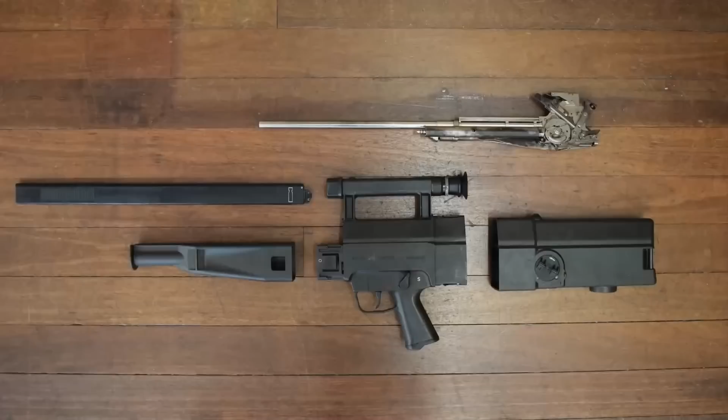I'm going to show you how to field strip an HK G11. Let's dive straight into the space magic and see how it works.

First we remove the G11's cleaning brush that's held in a compartment in the pistol grip. A little fiddly with just fingernails, but it's doable.

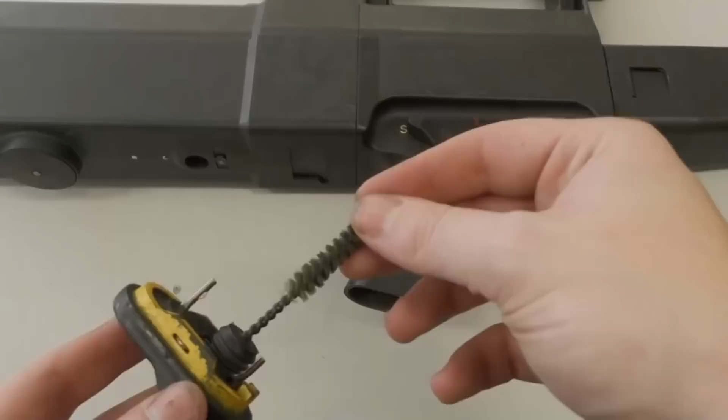The brush is used to check that the chamber is empty. It's inserted into the circular ejection port seen a few inches behind the pistol grip. This checks that the chamber is empty and that the weapon is clear.

And when you finish with the brush, you can insert it back into the pistol grip and carry on with disassembly.

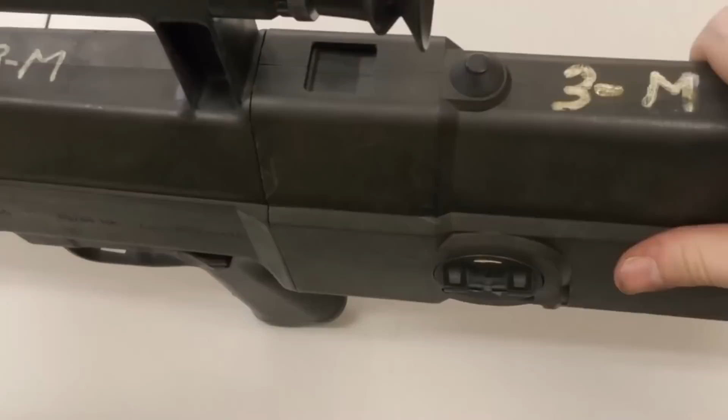Next we'll remove the G11's 50-round single stack magazine.

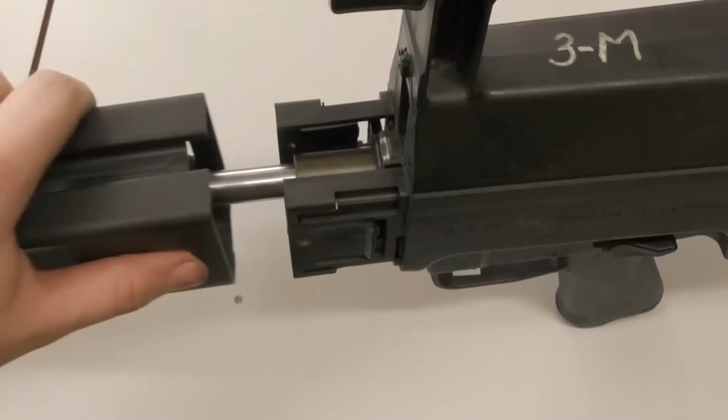As you can see, I've already freed up the fore end as the plastic locking tabs are quite stiff. Inside the fore end is a metal tube that the barrel projects through. The barrel assembly is essentially free-floated.

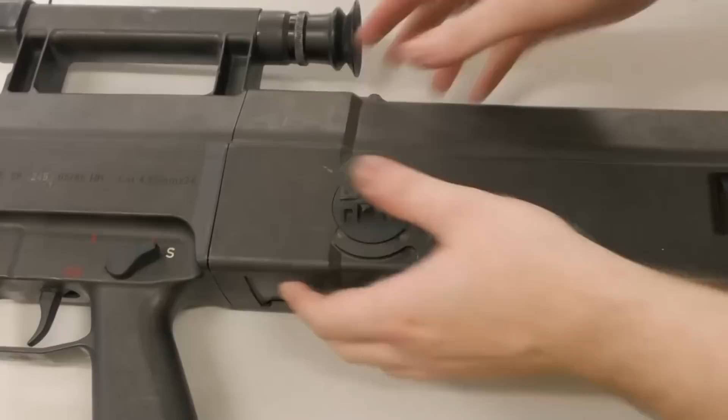Now we need to remove the butt assembly. To do this, we depress the two locking tabs at the same time and pull it to the rear. As you can see, it's a bit of a three-handed job here.

You have to ensure that the action is cocked to allow the rear assembly to slide off. And now we have the rear of the breech and barrel assembly exposed.

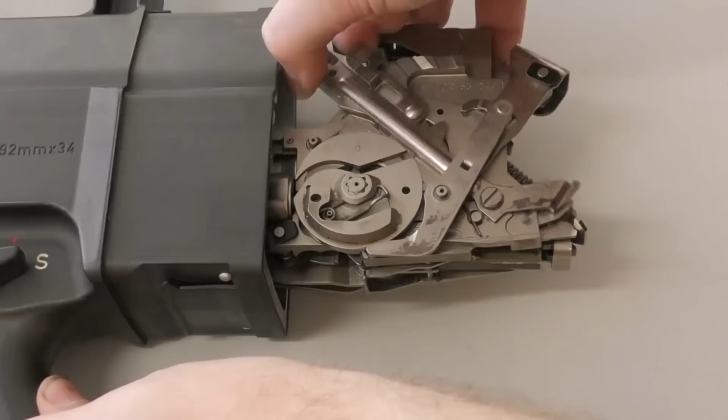The next step is to free the control disc. To do this, we lift the catch spring and move it clockwise until it clicks. Now we must depress the clamping spring to free the disc from its post. With the spring depressed, the control disc can be lifted up from the top of the cylinder.

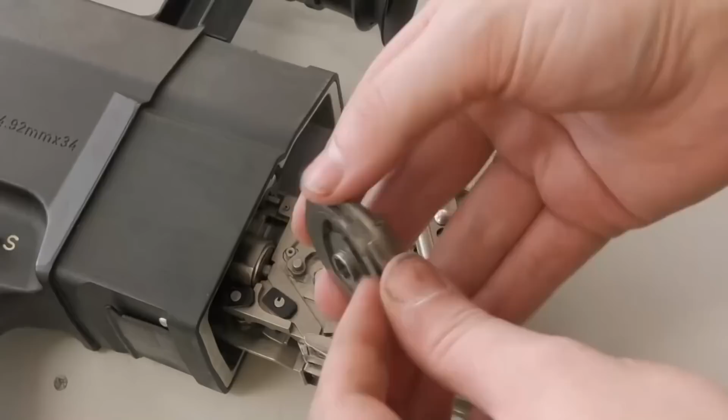We'll set the control disc to one side for now, and we'll take a look at it in a moment.

We can now push the catch spring clockwise again to its next stop point, so that it's no longer covering the cylinder.

Next we have to press the cylinder stop lever counterclockwise. Then, pushing up from the other side of the action, we can lift the cylinder out of the breech assembly. Sorry my hand gets in the way here, but it was a little bit tricky getting the cylinder out of the action.

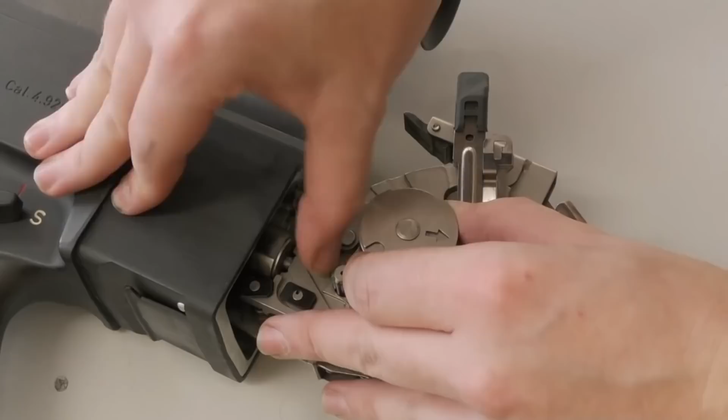Here we can see the square chamber inside the breech cylinder. This piece is held in place by a retainer spring. Now that the cylinder is removed, let's take a closer look at the breech assembly.

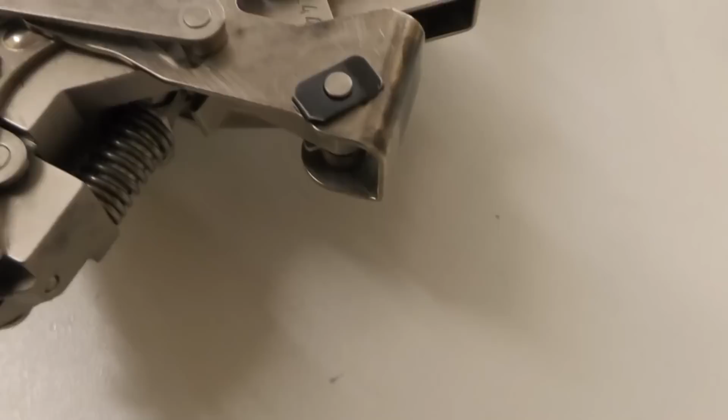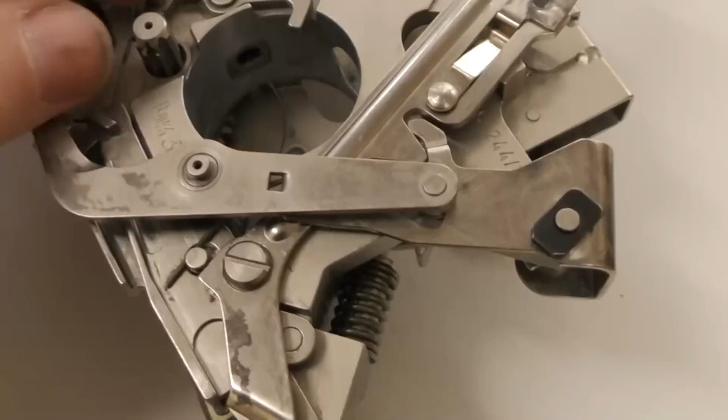We can see the compression spring which attaches to the clamping plate, the space for the breech cylinder and the beginning of the barrel, the spring catch and the ejector lever, the striker assembly, and the control lever, and beneath the action we can see the sear and the stop lever.

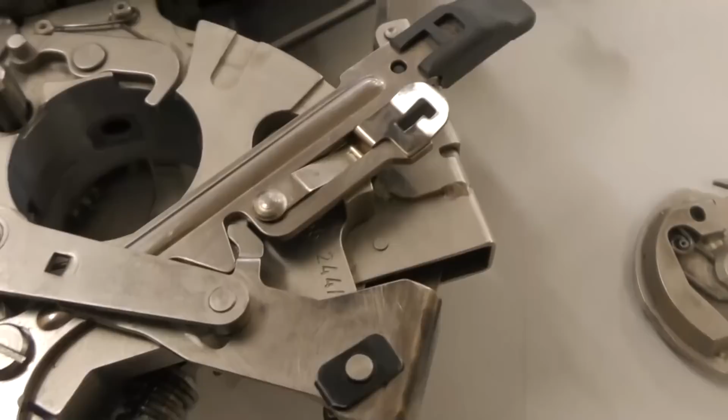And the part I'm pressing on here is the slide. We're now beginning to get an idea of just how complex the G11's action actually is. The 1989 HK ACR manual lists over 440 parts making up the rifle, with over 140 of those going into the actual action itself.

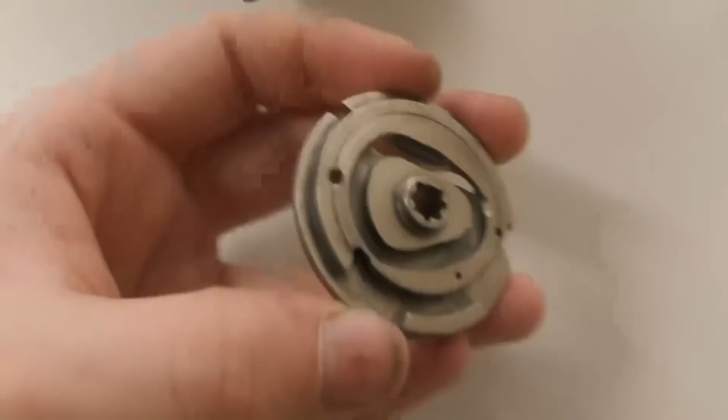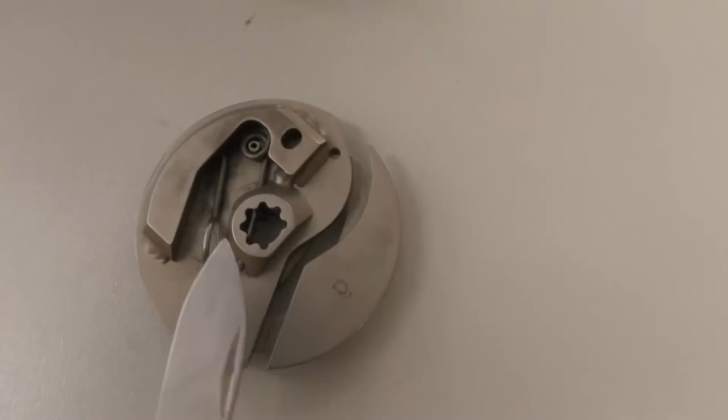Okay, now let's take a close-up look at the control disc. That outer groove interfaces with a tab on a pivoting latch, which interacts with the stop lever. Using my trusty Swiss pointing device, we can see where the central post interfaces with the disc and how the clamping spring clips into the notch on the post.

Here we can see where the square breech lines up with the round bore. And from this angle we get our first view of some of the G11's gears.

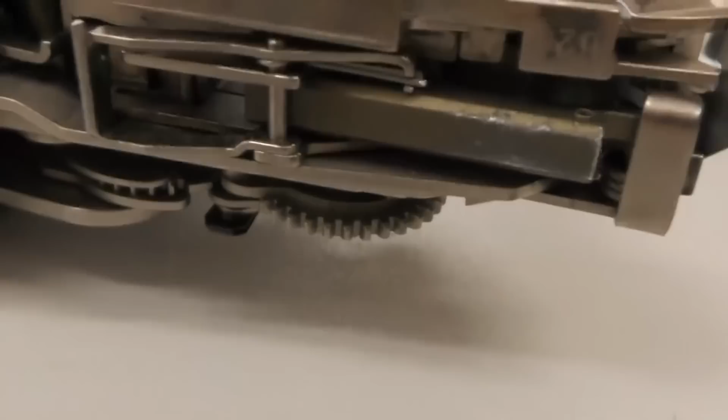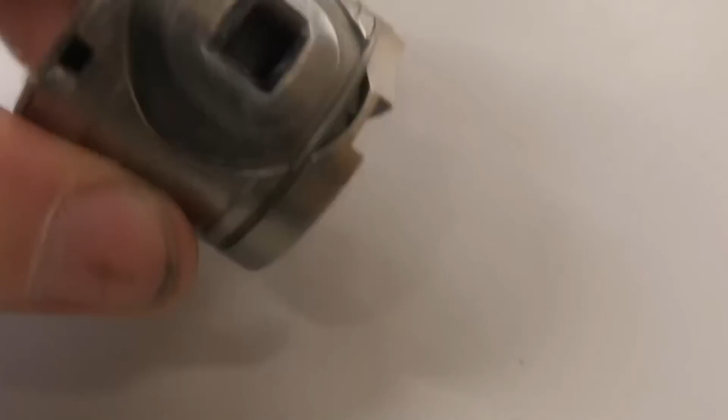Let's look at the breech cylinder. This can be disassembled further by removing the spring retainer which holds the chamber in the cylinder. But while disassembling I didn't want to take the risk of losing the spring.

The chamber was actually a replaceable part. HK literature from 1988 notes that the chamber had an approximate service life of around 3,500 rounds, but it was hoped that a planned redesign would extend this towards 6,000 rounds.

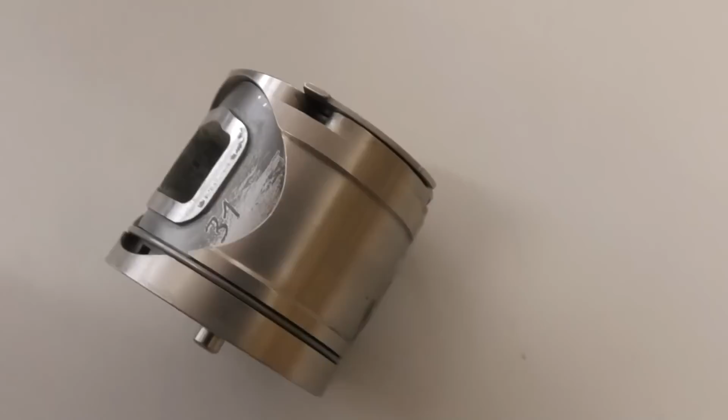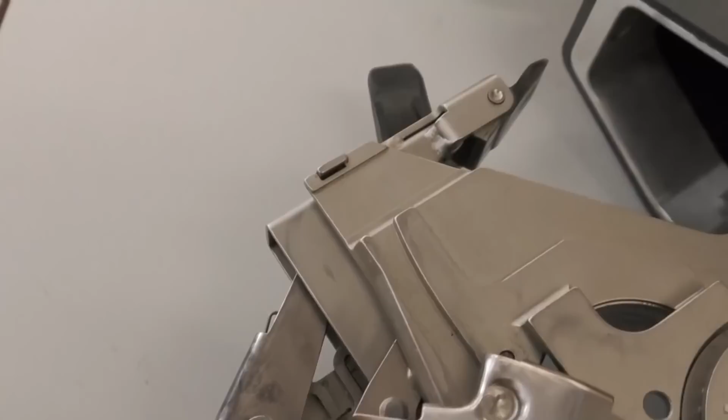With the weapon flipped, we can see the other side of the action. We can see the actuating lever projecting from underneath the spur gear, and from beneath that we can just see the disconnector. And here we can see the magazine catch and guide housing.

Here we can see how the G11's pair of gears move. During the firing cycle, the connecting rod, attached to the actuating gear here on the right, moves the gear, acting on the spur gear on the left. This in turn actuates the feeding lever, which we can see here moving up and down. Here at the back, attached to the clamping plate, we have the striker assembly and spring.

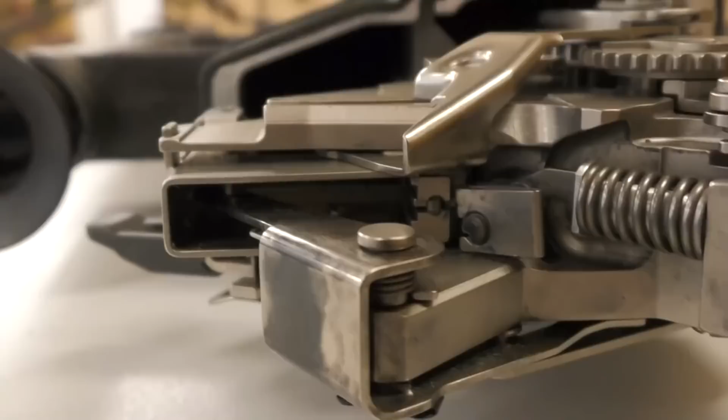From this angle we can see into the rifle's centre assembly. We can see the magazine guide and the robust guide rail where the barrel and breech assembly is held in the G11's centre assembly.

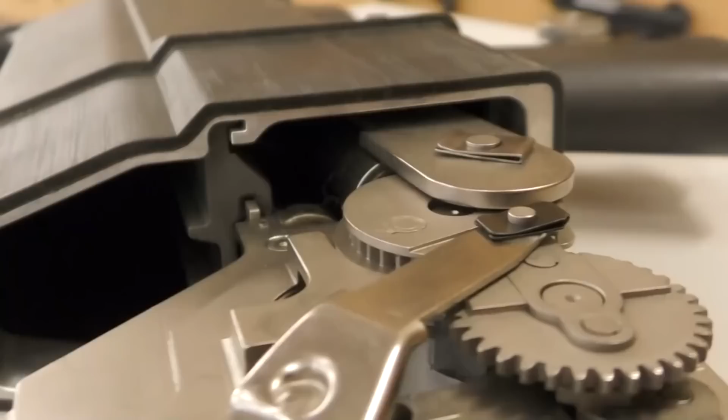And at the base of the action we can see the sear, and here's a side view of the G11's gears moving.

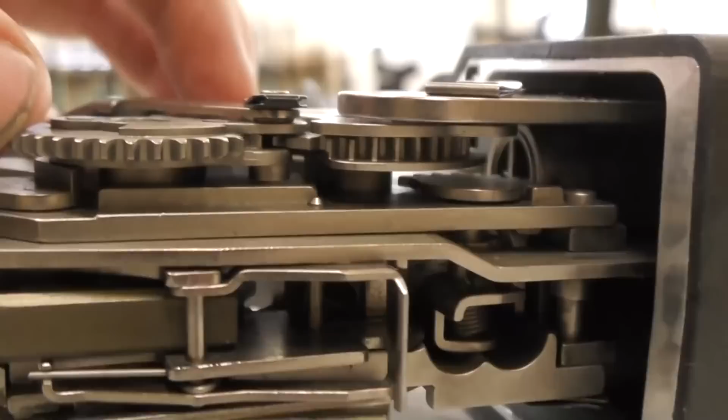Inside the centre assembly, just below the barrel, we can see the rear of the G11's recoil mitigation buffer system.

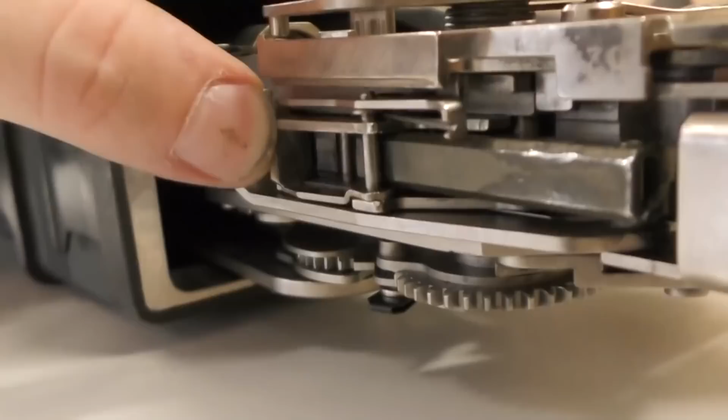From this angle we get an idea of just how intricate and complex the G11's action really is. We can see a number of springs and numerous high tolerance moving parts.

Here, with the weapon on safe, we can pull the trigger to show how the actuating lever acts on the clamping plate and compression spring, which in turn acts on the firing pin.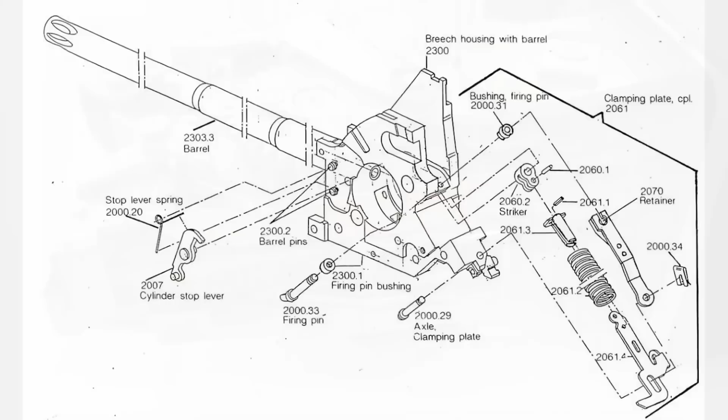These diagrams from the G11's manual go some way towards showing how complex the action actually is.

The magazine, when loaded, travels back through the centre assembly into the action. Here we can see the magazine catch, which is acted on by the external magazine release button.

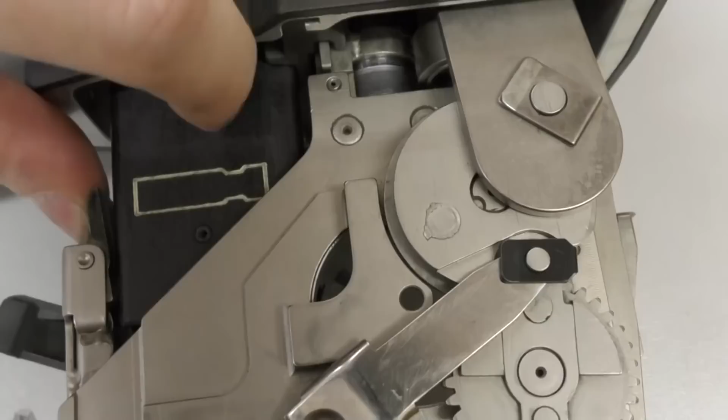Here, with the magazine inserted, we can see how the catch works. Note the white outline of a caseless round to show which way up the magazine should be inserted.

Once the breech cylinder is removed, the operator's manual provided to the US Army in March 1989 actively discourages further disassembly. I could only go a little further before special tools that sadly I didn't have were needed.

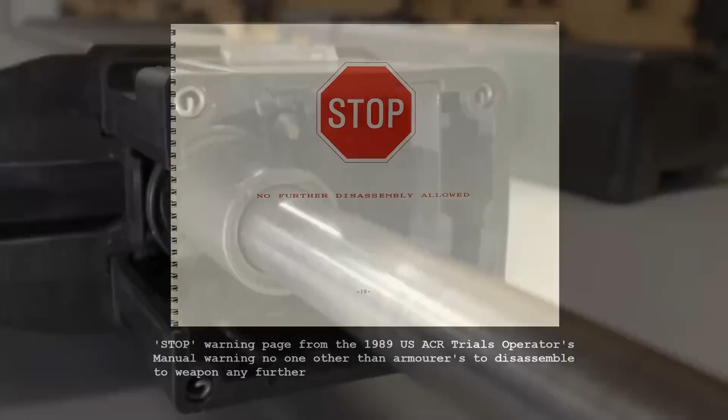To release the breech and barrel assembly from the central assembly, a small catch has to be released to allow the breech assembly to come free, allowing it to slide out of the rear.

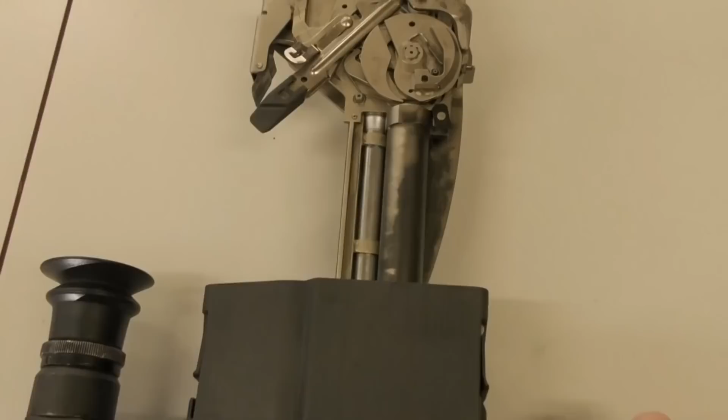Here's the G11 disassembled into its major assemblies. We've got the magazine, fore end, centre assembly, barrel and breech assembly, and buttstock.

During a field strip of the G11, it's not necessary to remove the barrel and breech assembly from the fore end and centre assembly, but I decided to do it so that we could have a look inside at both the gas cylinder and the buffer assembly.

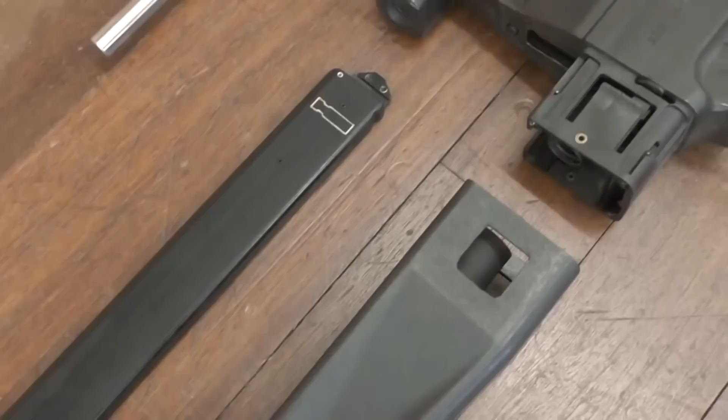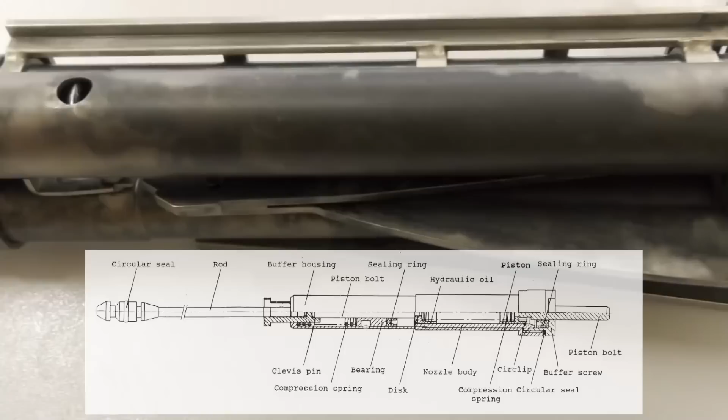Here we can see the housing containing the counter-recoil mechanism, which mitigates the weapon's recoil. We can also see the pointed tip of the buffer extension. This overlaid diagram from the 1989 Armourer's Manual shows the internals of the recoil system.

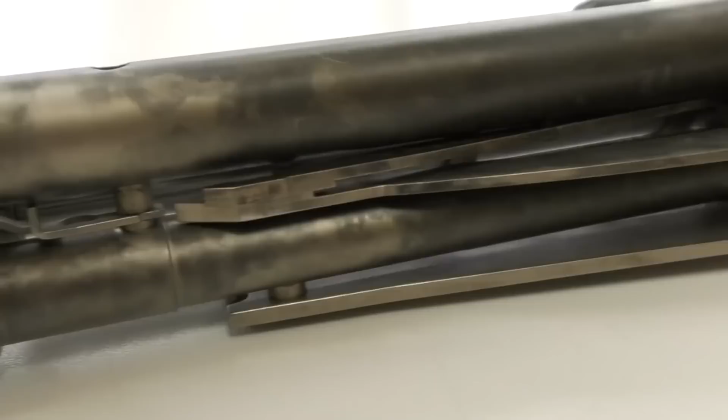Under the barrel we can see the sear arm, operating rod, and the various catches, springs and clips which hold the assembly together.

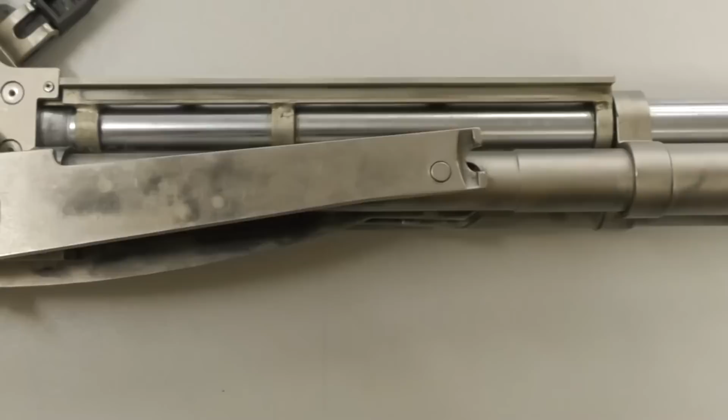On the right side of the gun we can see where the operating rod connects to the gas piston system, and at the other end of the rod we can see where it attaches to the actuating gear.

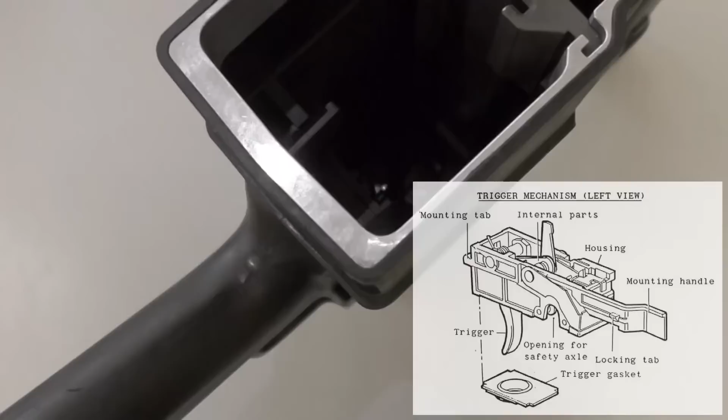Let's take a look inside the central assembly, which houses the trigger mechanism and the guide rail interface. Above the guide rail we can see the sealed track that the magazine runs in.

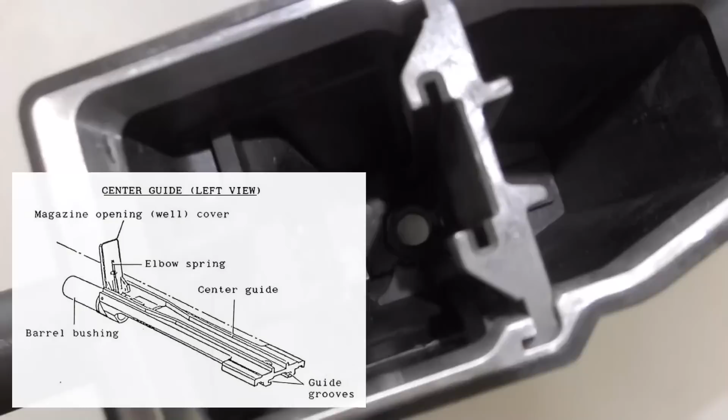Here we can see the hole in the centre assembly that the barrel projects through. And in the magazine compartment we can see the hinged door that stops dirt from entering the action.

Okay, before we reassemble the rifle, let's take a look at how it worked in principle. G11 has 3 modes of fire: single shot, 3-round hyperburst at approximately 2,000 rounds per minute, that's about 33 rounds per second, and full auto at 460 rounds per minute.

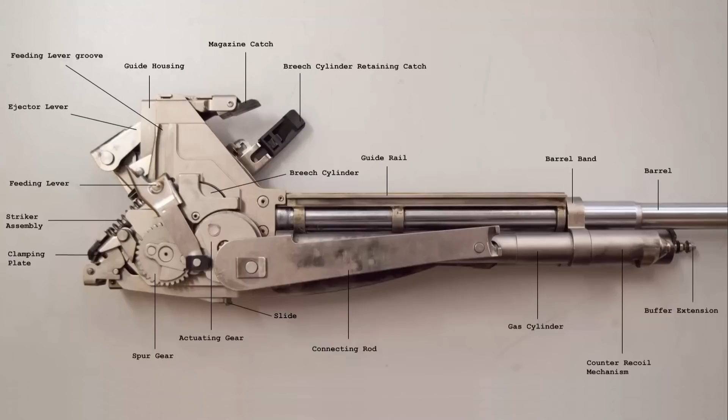It's a gas-operated rotating breech system with a spring buffer system to control recoil. Rotating the weapon's cocking handle drops the first round into the breech cylinder vertically. It then rotates 90 degrees with the breech cylinder lining up with the bore.

When the trigger is pulled, the striker assembly ignites the round and fires the weapon. As the rounds are caseless, there is no extraction of the spent cases. An ejector is present for clearing the weapon only.

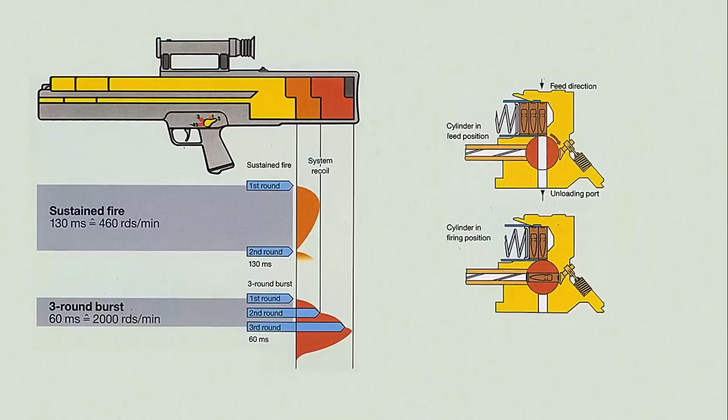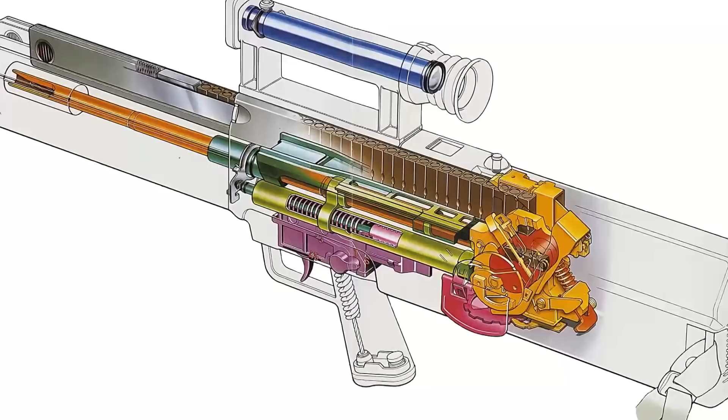Once a round is fired, propellant gas is tapped from the barrel, and a piston system connected to the breech cylinder rotates the cylinder and actuates the loading mechanism, before rotating the cylinder back into battery and allowing the cycle to begin over again.

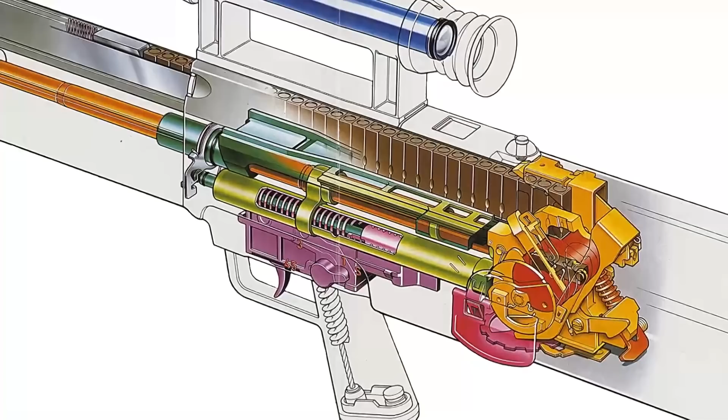When a round is fired, the barrel and breech assembly recoil along the guide rail in the centre assembly. This compresses the recoil spring into the buffer.

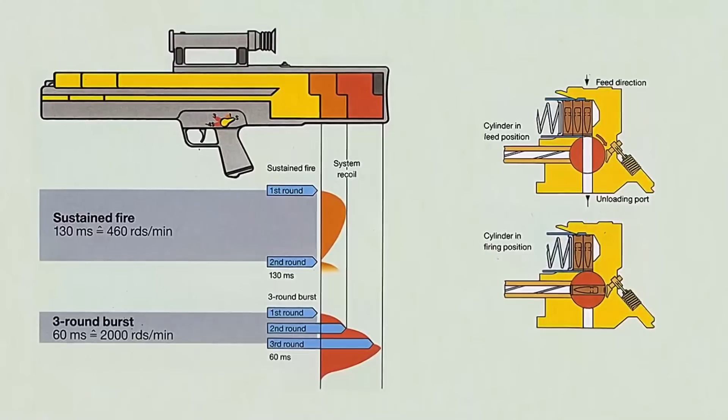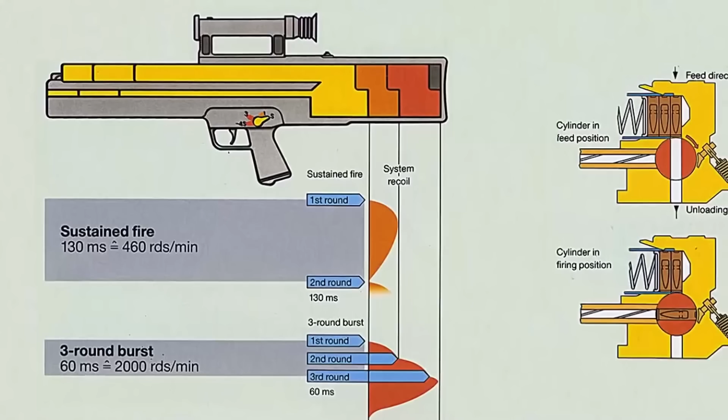In single shot, the barrel and breech assembly moves about 50mm or 2 inches towards the rear. In burst mode, it moves 110mm or 4.3 inches, but only once the last round of 3 has left the barrel. This limits recoil until the last round has been fired, and ensures a smaller round dispersion downrange.

While sadly I didn't have the opportunity to fire the G11, there is a very good video which demonstrates the G11 to its fullest capabilities. Filmed in 1990 at the Aberdeen Proving Ground, it features a pair of HK G11 K2s. An HK capability demonstration shows the weapon firing in all modes, while subjected to environmental factors like sand and water. We'll take a look at the capability demonstration video in full, and then we'll reassemble the rifle.

The next demonstration will be conducted by Heckler & Koch, and Mr. Brett Gunther from Heckler & Koch will tell you about what he's going to fire.

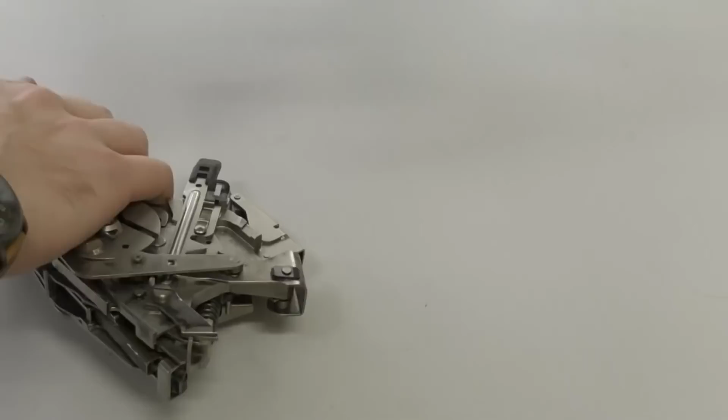Okay, let's reassemble the G11. First we insert the barrel and breech assembly back into the centre assembly, lining up the guide rails until it locks into place.

As you can see, this was a little tricky lining up the barrel with the hole at the front of the centre assembly. But eventually, the barrel and breech assembly seat home with an audible click.

Then we place the breech cylinder back into the action, align the cylinder, and let the cylinder stop lever go home.

And then we slide the catch spring counterclockwise until it clicks into place.

We then replace the control disc—this is one of the most fiddly steps—and allow the catch spring to seat.

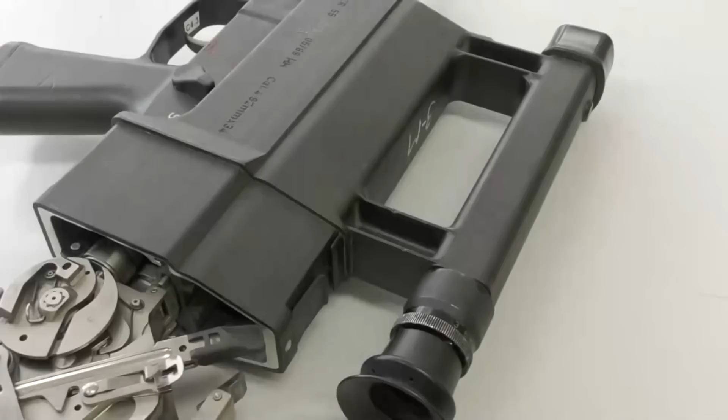Then we replace the buttstock assembly.

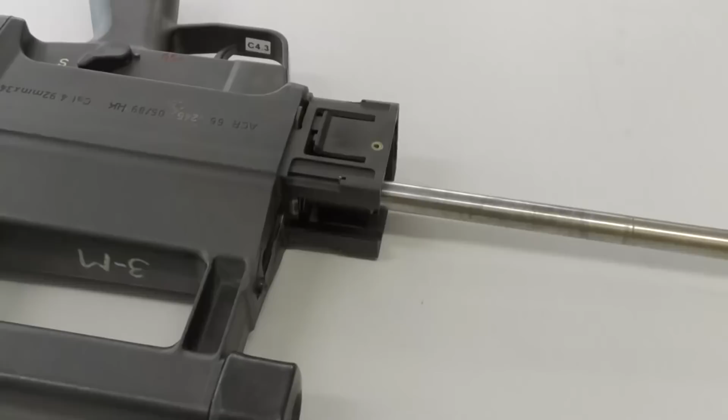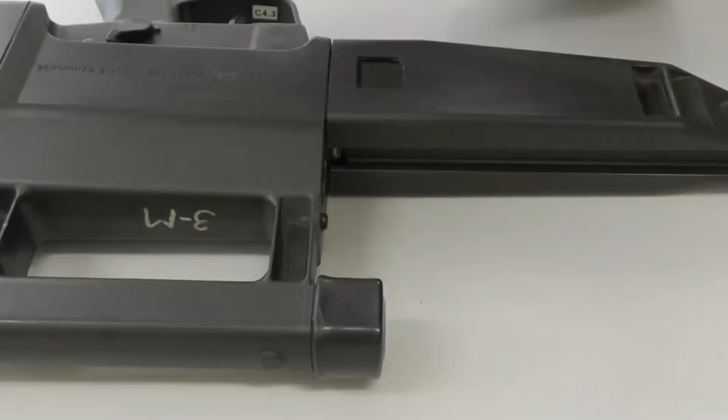And finally we replace the fore end and slide the magazine back into the weapon.

Thanks for watching, guys. I hope you enjoyed this look inside the mysterious and legendary G11. Special thanks go to the collection that holds the G11 for allowing me to strip it. Definitely one of the more nerve-wracking experiences I've had, but a real pleasure to get a look inside the mythical beast firsthand. I hope from this video you can get an idea of just how complex and ambitious the G11 was. Thanks for watching, guys.

I filmed the original video a few years ago and I've been intending to remaster it, make some corrections, and add the demonstration footage for a while now. Hopefully I'll get round to covering the broader history of the G11's development in the future, and I might even get a chance to take a look at this particular G11 again as well.